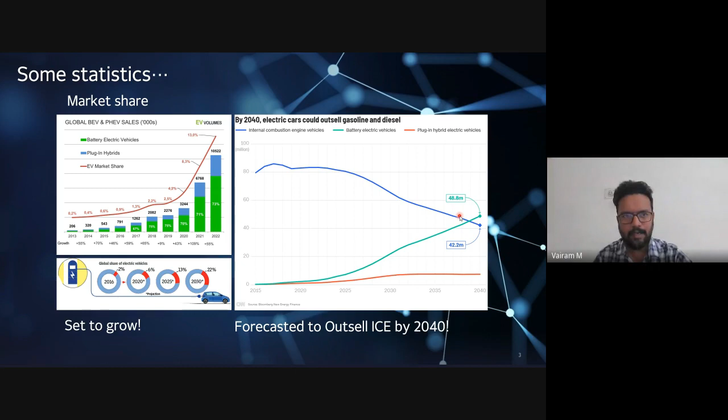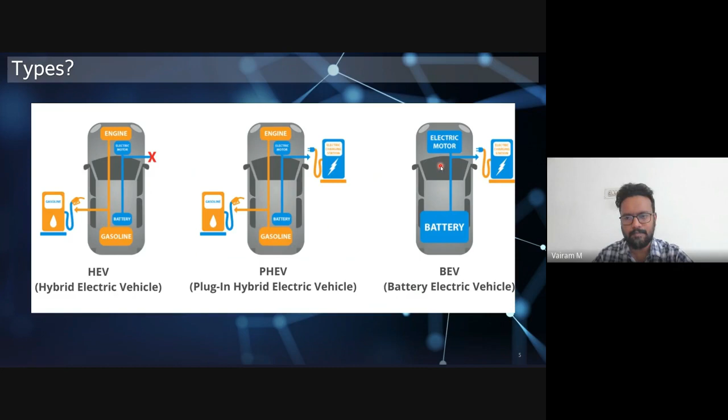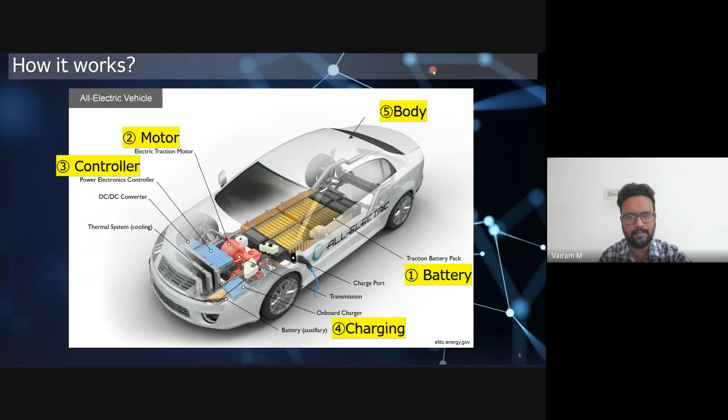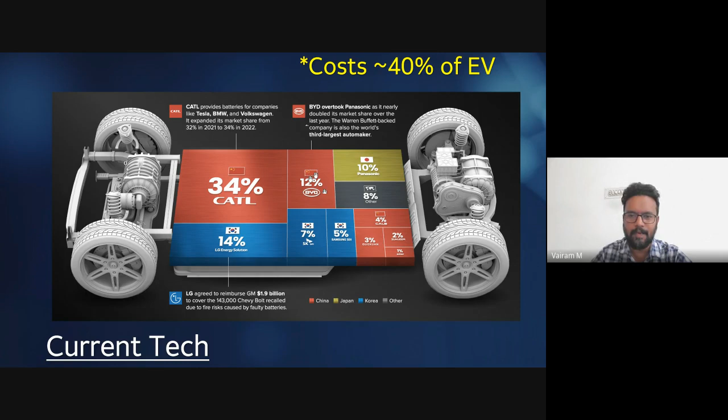Second is Korea. BYD is also mainly a battery manufacturer, so there's no surprise that they are leading the electric vehicle segment also.

Does anyone know what types are available in batteries? Lithium ion. And next, lead acid batteries. I have only 2 answers received - one is lead acid battery, and another one is lithium ion battery.

So where have you seen lead acid battery? Any idea? It is very commonly used in households, inverters, right? Yes, so most two-wheelers and, as you said, inverters and whatever power backup we are using, is commonly lead acid.

And lithium ion, can someone give an example? Mobiles, yeah, mobiles, laptops, and all rechargeable small electronic devices usually use lithium ion. So what is the challenge? As you can see, the most commonly used battery type in electric vehicles is lithium ion.

Because it is very... is my screen visible? Yeah. Okay, so as you can see, this is the power, energy density against weight. The x-axis is weight, and this is the energy density.

Volumetric energy density, and this is specific energy density. So lead acid is very low - it is very heavy and has very little energy storing capacity. This is nickel cadmium, and another nickel-related battery, and this is lithium ion. As you can see, lithium ion is already in the best position possible - even though it's the smallest in size and lightest in weight, it still holds the higher position for energy storing capacity.

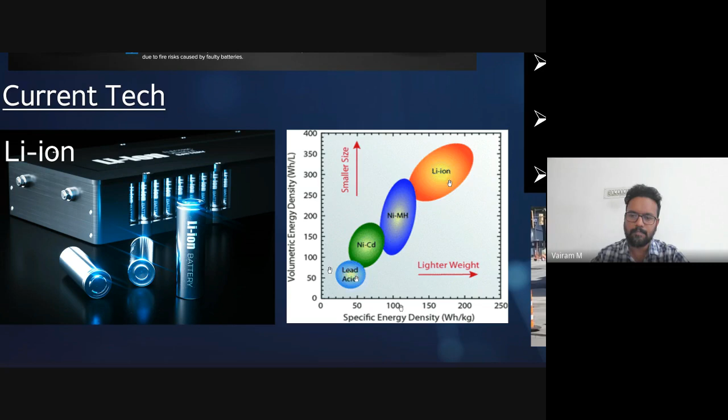That's the reason all small electronic devices can utilize lithium ion battery, and even in automobiles it has a major contribution. So, challenges - I already displayed it, but I will explain.

So one big challenge is about lithium. Lithium is taken from raw material by mining process, and the availability of that raw material is very less. And lithium ion batteries include some other materials like cobalt, or some other ions together. It is used, and they are also very expensive and very difficult to process, extract from the raw material. Okay? And it has degradation over time, and after so many cycles, it will be reducing the energy storage capacity. And recycling is a very big challenge.

So you might have seen that symbol in your mobile battery or something. So you should recycle it very carefully, right? So the same way, just imagine it is a small mobile battery, and just imagine some thousands of mobile batteries packed together and kept in a car. So how risky, or how much precaution we have to take for recycling that one.

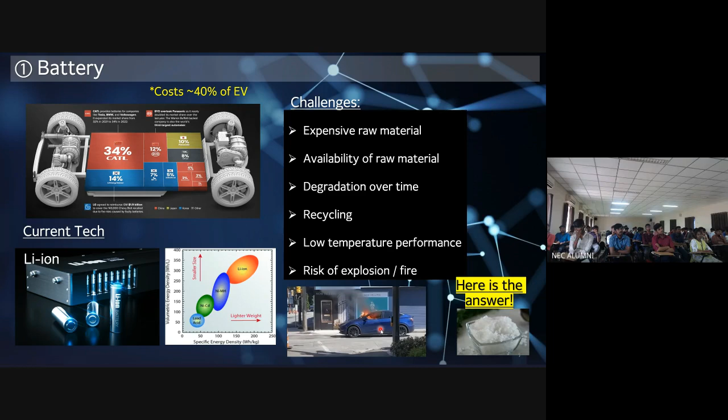I expect more answers. And I have given the clue in the screen, you can see. Okay, so one more clue. You can see it, we use it every day in our daily life. Sodium based. Sodium chloride based battery. Exactly.

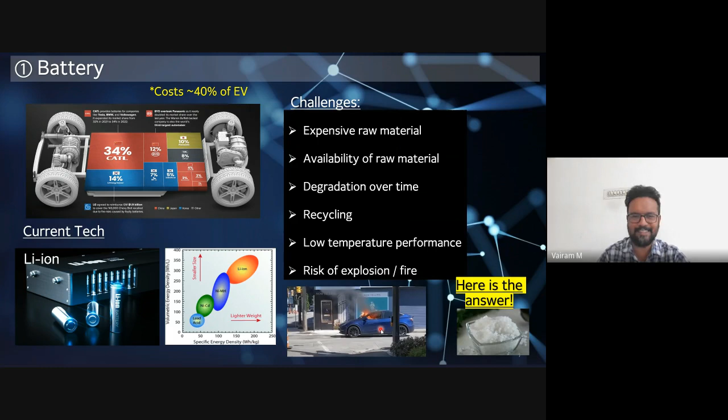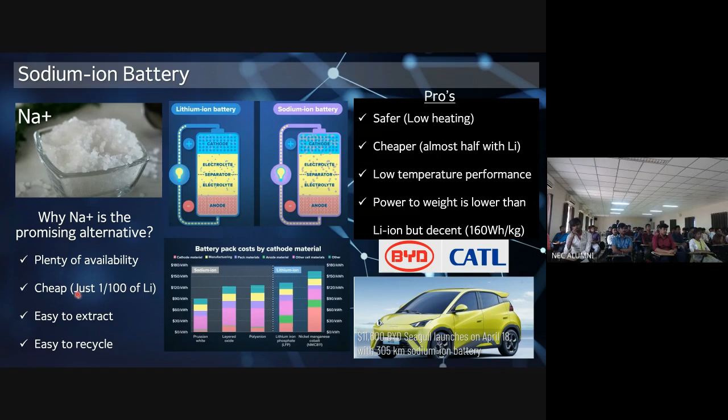So basically, it is a sodium ion battery. So there is plenty of availability in seawater, and it is very cheap compared to lithium. From lithium raw material, it is just a hundredth of the material cost, and it is easy to extract from raw material, and it is easy to recycle also. So that's why sodium ion battery is considered to be a promising alternative for lithium ion.

So still it is not 100% started using, right? So it is like an emerging technology. In earlier days, when they started exploring for battery development, this was also one of the options for sodium ion, also one of the concepts, which is very similar to lithium ion, but due to higher performance and manufacturing ability and usability, like versatile power storage capacity, lithium ion was preferred, and the entire industry was focusing on lithium ion.

But in a later period, everyone could understand, okay, lithium is a limited resource. It has a mining process, and we have to extract material, and it has difficulty for recycling. So while looking for the alternative, then again almost all the battery development industries are working on improving, focusing again on developing sodium ion batteries.

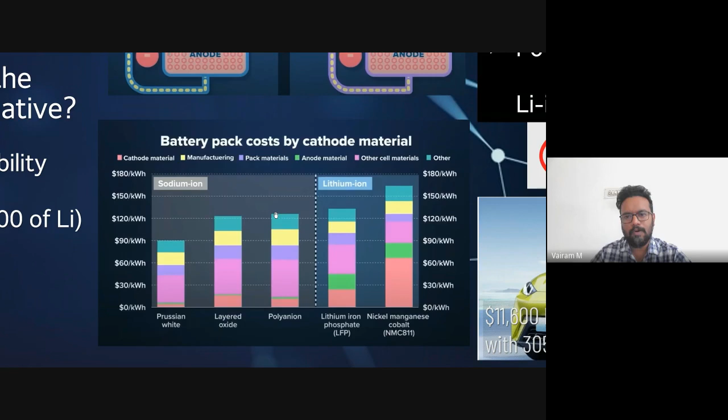So as you can see, whatever the development or implementation of new technology, the implementation cost plays a major role, because as you know, long back, batteries were expensive, electric cars were expensive. Comparatively, it is now reducing in cost. But if sodium ion comes into place, it can even further reduce cost, and almost half of this is the battery pack cost of lithium ion compared to sodium ion. So you can see almost half of lithium ion cost can be achieved by switching to sodium ion.

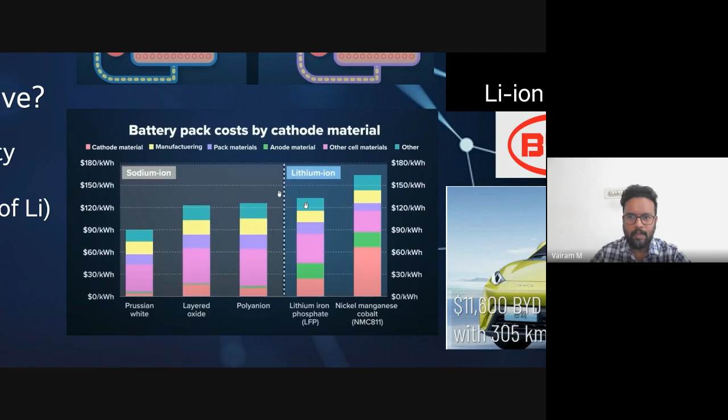So with sodium ion, we can achieve cost savings, and compared to lithium ion, we can almost achieve the same capacity of power to weight ratio, but it is comparatively closer, though still less compared to lithium ion. But there are many advantages: it is safer, it has low heating and low risk of explosion, and it is easy for recycling, and it is cheaper. As I said, it is half as expensive as lithium, and it can perform well in low temperature.

And so currently, the main battery manufacturing companies like BYD and CATL have already started manufacturing. They invented the manufacturing technology for mass production of sodium ion batteries, and it has already started being adopted as an alternative for lithium ion. So you can see this BYD Seagull. It was launched last April. It has about 300 kilometers of range. It is made with sodium ion battery.

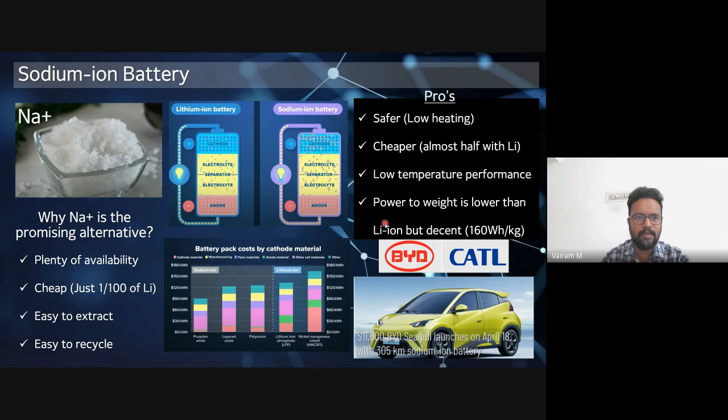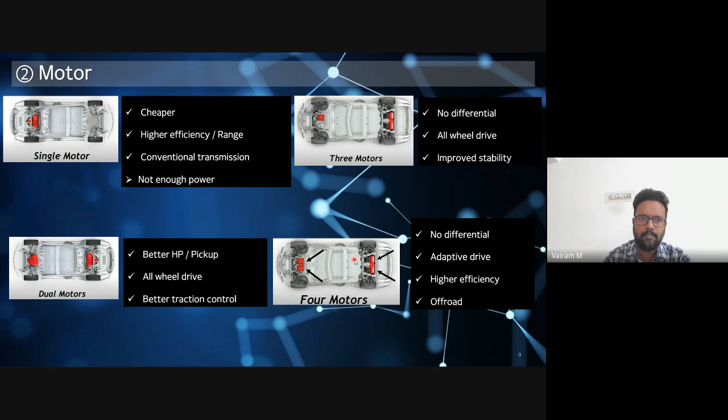Can someone say? By the name itself, we can guess what is the basic difference. Any guess? What is the answer? Axial? Wait, axial flux - what is the axial flux? Say something.

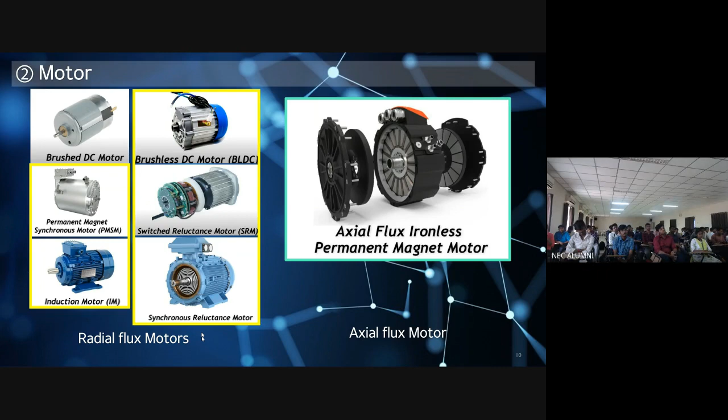One student is saying the arrangement of magnets is different. Exactly, that's a very good answer. Actually, yes - arrangement or alignment of magnet, or you can say magnetic flux, is perpendicular to the rotary shaft in radial flux, and it is inline or coaxial in axial flux motor. So that's the basic difference, as you can see here.

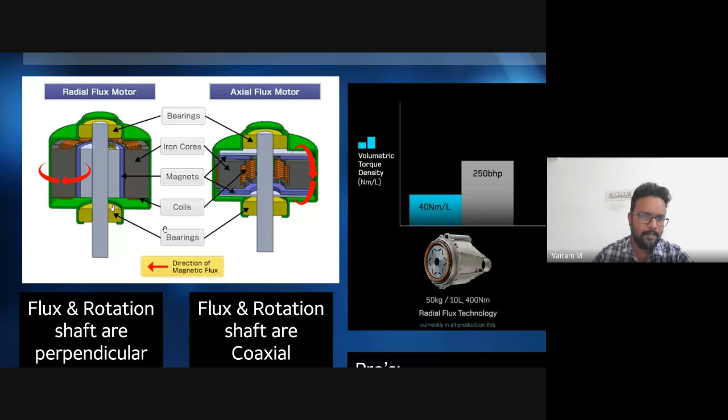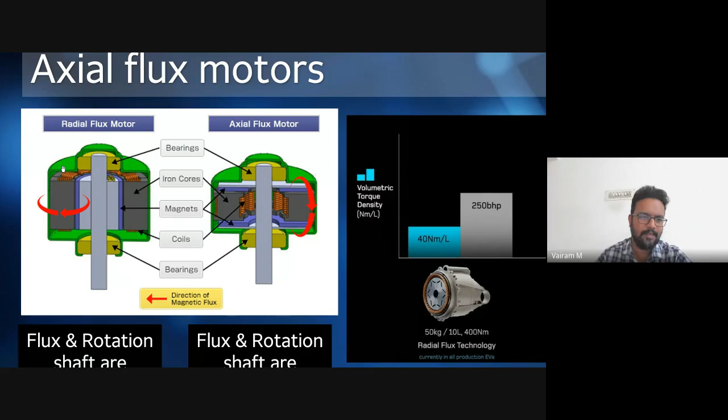So you might have already studied this topic maybe in electric drive. Radial flux has a perpendicular flux, and this one is coaxial.

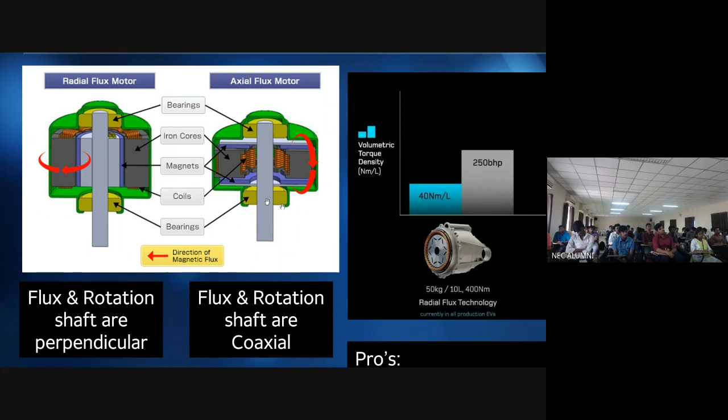So what is so new in this axial flux? It is comparatively smaller in size, and it can provide more torque output, and it is more durable.

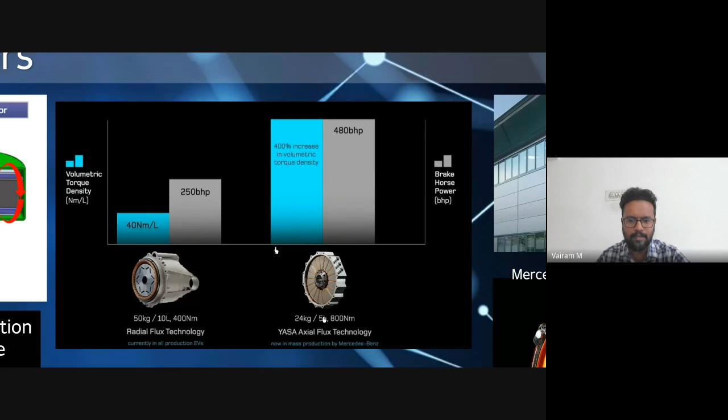So here is a comparison of torque output of motors. This is radial, a very common type used in electric vehicles, and this is an axial type example. The radial type has output torque 400 Newton meter and 250 bhp - you can see almost half the size, half the weight - this is 50 kg weight and this is just 24 kg, 10 liter of volume versus just 5 liter, and almost double the horsepower is produced.

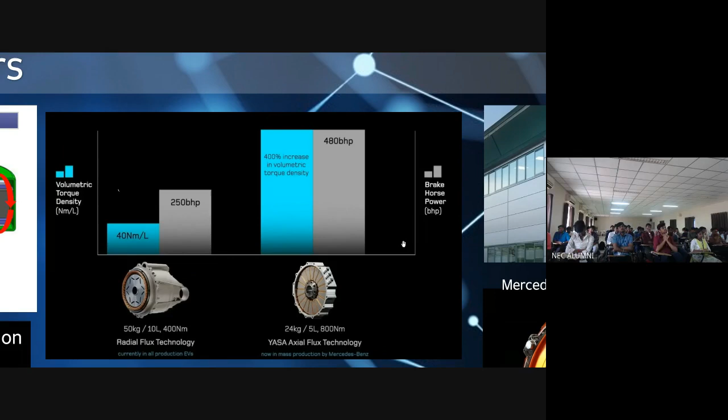And if you see the volumetric torque density, it is 4 times higher than radial flux. Then why is it not used so far?

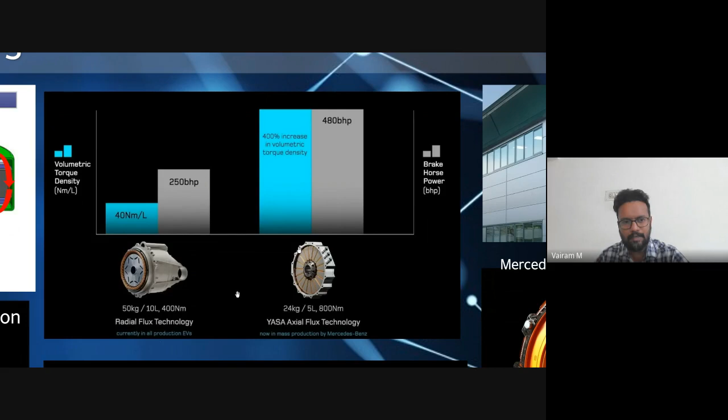Right, so similar to what we said for sodium ion, this concept or type of motor is already available from very long back, but how to produce it as mass production, or how to manufacture it in a cost effective way - that is not established yet. So that was the challenging point to implement it as an alternative for radial flux.

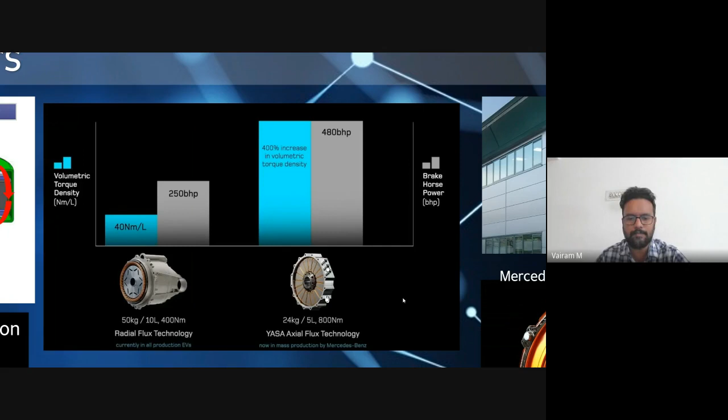So as I said, this is smaller in size with more torque output and better traction control. But it is complex in design and more challenging and expensive to manufacture.

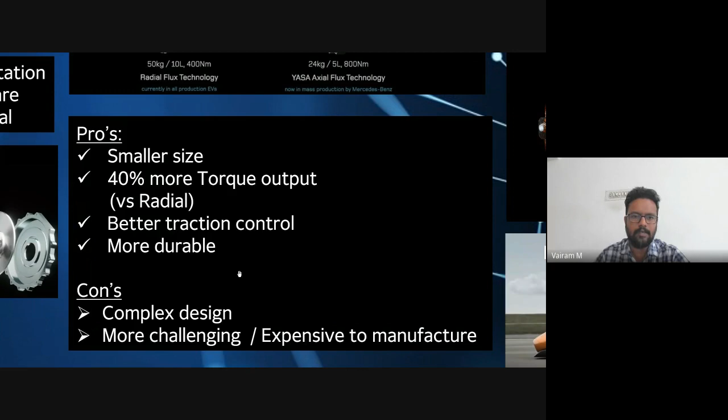So has anyone heard about this company named YASA? It's a British origin company. They are manufacturing motors - one of the leading manufacturers for axial flux technology.

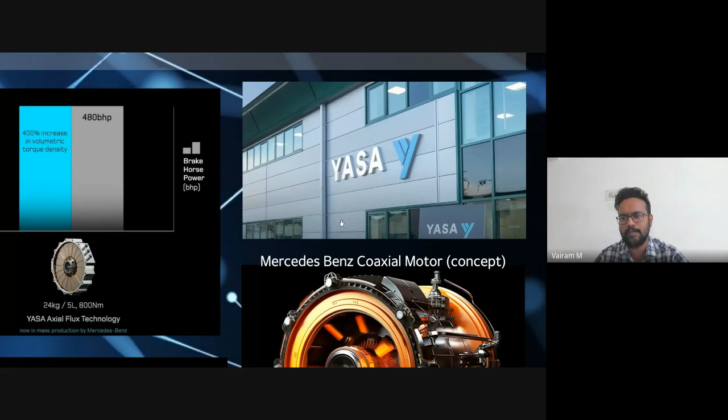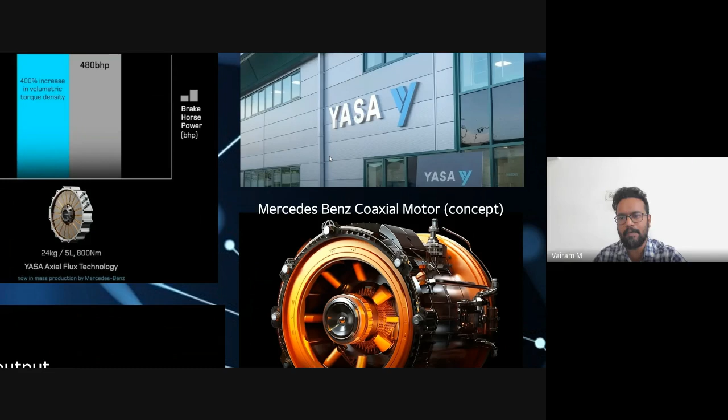In earlier days, maybe around 40 or 50 years ago, they already started axial flux, but it was discontinued - no one had interest in axial flux because of this complex design and difficulty to manufacture. But at that time, Mercedes-Benz bought YASA and invested in R&D, and they developed further and invented the mass production condition and production method, and they are planning to implement it as an alternative in upcoming vehicles.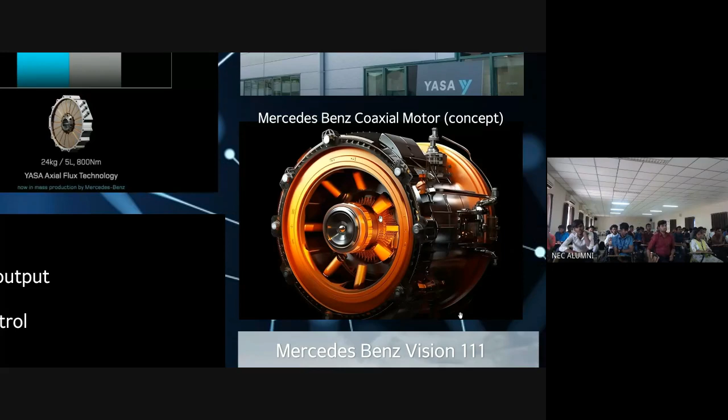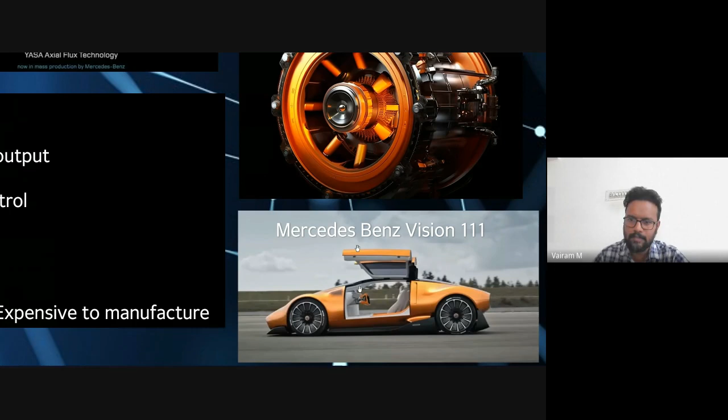So this is just a concept of coaxial motor going to be used by Mercedes-Benz. This will be the first car from Benz to use axial flux technology - the Mercedes-Benz Vision 111. So for now it's in concept phase. So far, any questions?

Any questions? Okay. Sir, I'm Akash. Yes, yes, please.

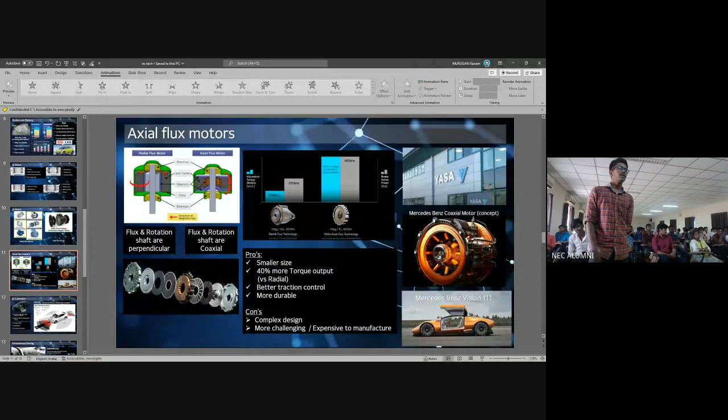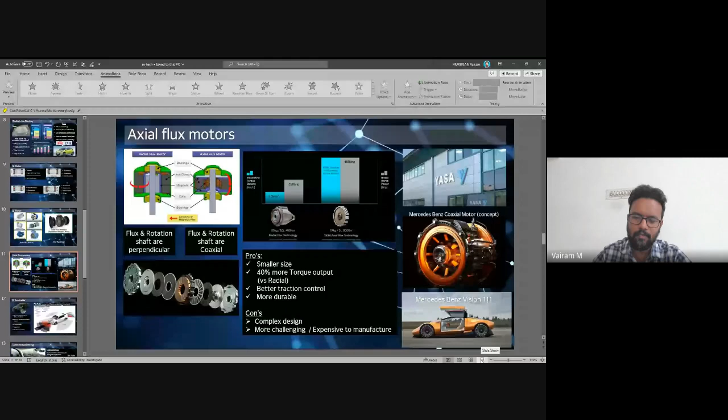Like heavy duty vehicles we can use, but so far we are not able to use it fully because it is a complex design. Whenever you want to commercialize something, you have to manufacture it in a cost effective way. If it is too complex to manufacture, you cannot implement it as a commercialized version, right? As a concept version or one time manufacturing you can do, but if you want to sell it and it is too expensive, for example 10 times more expensive than radial flux, why should I buy it? So that is a basic issue.

Whatever may be the industry, the cost plays a decisive role. Major decisions are taken from the cost effective point of view.

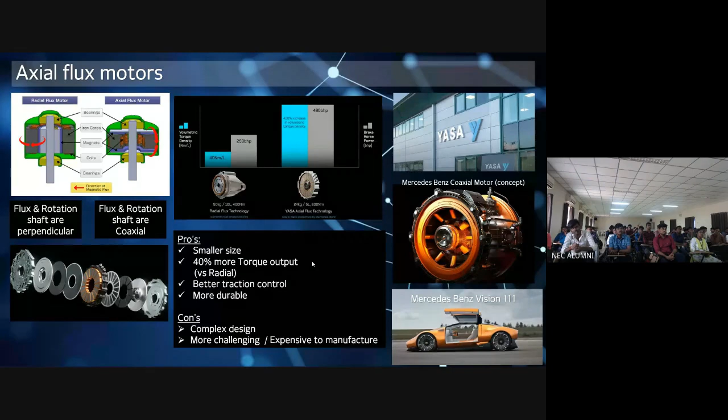I have one question. Yesterday Tesla launched the Cybertruck. Please share some views on the Cybertruck. Yes, sir. I have some points related to the Cybertruck in upcoming slides. We will discuss that together. Okay.

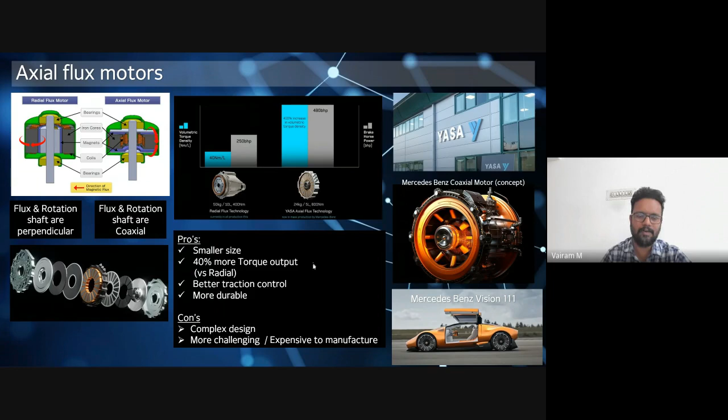Moving next from motors, we have a controller, right? Have you heard the term ADAS, Advanced Driver Assistance System? Since it is electric cars, the entire discussion is oriented towards electronics control and electrical drives, but don't think it is not our subject. It is a part of our core subject. So can someone say what they know about ADAS?

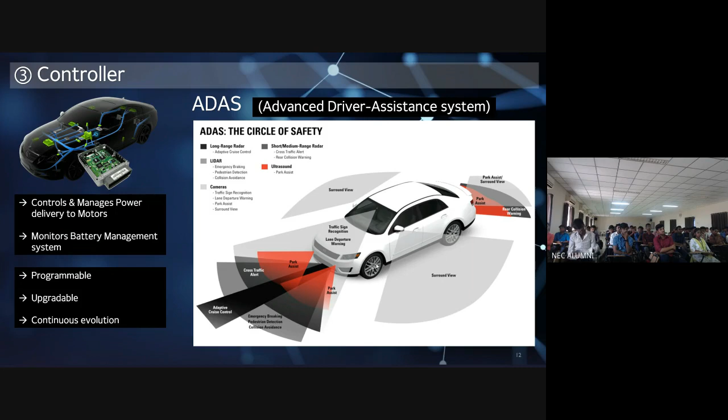Sensors. Very good. It is used in autonomous vehicles. It is used for detecting the path, lane control. Like the Mahindra XUV 700, they have implemented ADAS in India. Exactly. And MG Motors has an ADAS system.

This advanced driver assistance system is one of the safety features. Basically it has many sensors; it takes input from the surroundings and makes a decision by itself based on the logic program. So why is it so related with electric vehicles? Why not IC engines? Any answers? We have ADAS systems in IC engines also. ADAS and autonomous driving are two different topics.

ADAS is basically for assisting. Mainly adaptive cruise control and emergency braking: if some obstacle comes across all of a sudden, it can brake by itself without waiting for the driver to push the pedal. These safety features are based on ADAS, and all the automotive giants are investing a lot of R&D in ADAS. So why it is so related with electric vehicles, maybe you can see from this image.

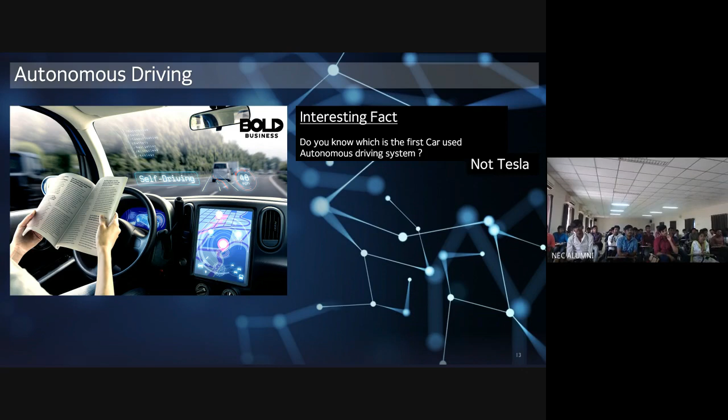The second was already mentioned by someone: autonomous driving. So one open question: does anyone know which was the first car to implement an autonomous driving system? And I added a comment, it's not Tesla. Google, I think so. No, sir. Volvo? Not Volvo. I think it should be Apple, Microsoft, or Google. It is an automotive giant. Automotive giant, okay.

And it was done way back, more than 30 years ago. It is actually Mercedes-Benz. Around the 1980s, they implemented the first autonomous car. It had autonomous driving features like lane changing and cruise control.

So what is so interesting about self-driving and driverless cars? You might have seen many automotive expo images with the concept of a driverless car, where there is no steering at all. It is automatically driven. Those are continuously evolving technologies, implemented in some areas.

As you well know, self-driving is already well established in Tesla. From the beginning they have been working on the autonomous driving concept, so Tesla is way ahead of other automotive makers.

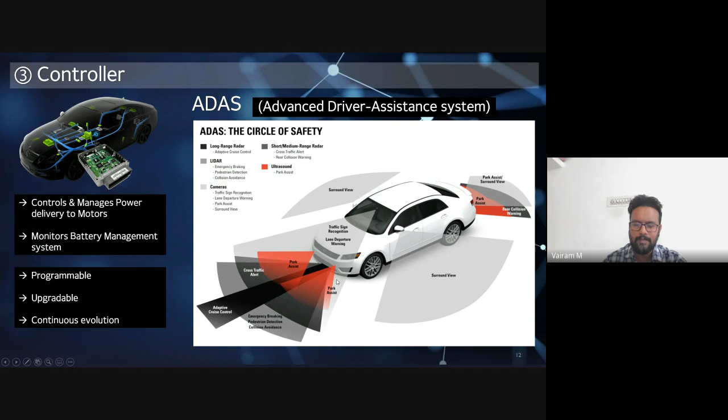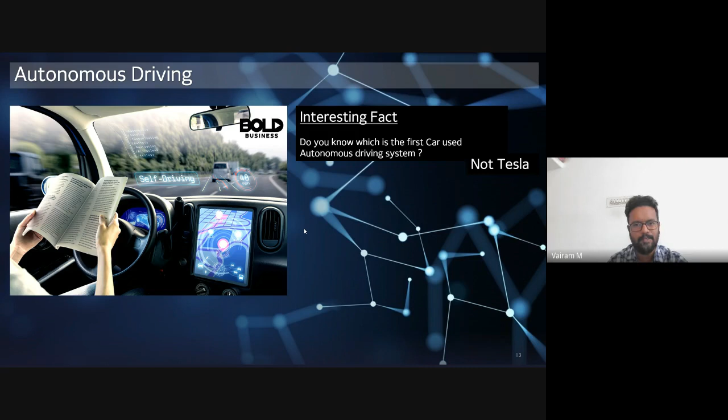It is also a continuously evolving technology, and you might have already seen videos about Tesla autonomous driving and the XUV 700. Those are ADAS features, and MG has implemented them too. So maybe we'll move to the next one.

Okay, so next is charging. Charging plays a major role, right? We have to charge the vehicle for a certain period to drive; it may take about 7 or 8 hours, very long hours, for battery charging. So one emerging technology is called vehicle to grid. So why do we need it at first?

In simple words, vehicle to grid means the battery of a vehicle will be used as an energy source for other electric appliances. For example, from the grid, our EB connection, we receive power to our house, we connect the charging unit, and through the charging unit we charge our electric vehicle, right?

So sometimes when there is a peak load for the grid, it can give back some charge. So why do we really need it? It means there might be a power surge all of a sudden, a supply-demand peak all of a sudden. So as we are charging the electric vehicle for long hours, it will be kept connected all the time. So whenever there is a fluctuation, the battery of the electric vehicle can support, so that the entire balance of supply and demand can be managed better.

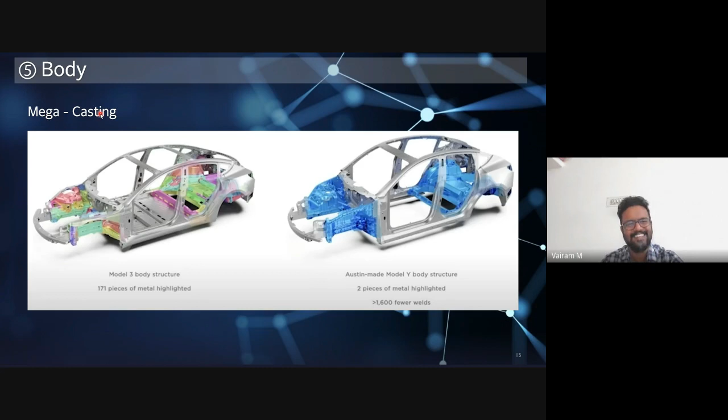So, any idea what manufacturing method is used very commonly in automotive body construction? Oh, sorry, the title is casting, but it is not related to casting. Casting is not the very common method used for manufacturing the automobile platform. It is an evolving technology, but it is not 100% adopted. Anyone knows? Sheet metal pressing. Exactly. Sheet metal pressing and assembling with robots.

Exactly. And the exact process used for sheet metal assembly, the joining process? Spot welding. Exactly. Sheet metal is a normal sheet with a defined thickness, from 0.65 mm to maybe 3 to 4 mm maximum, formed into the required shape with a simple forming process, and small parts are assembled together generally with spot welding, or wherever there is no access, they use arc welding. So this is the primary manufacturing method for the automotive body.

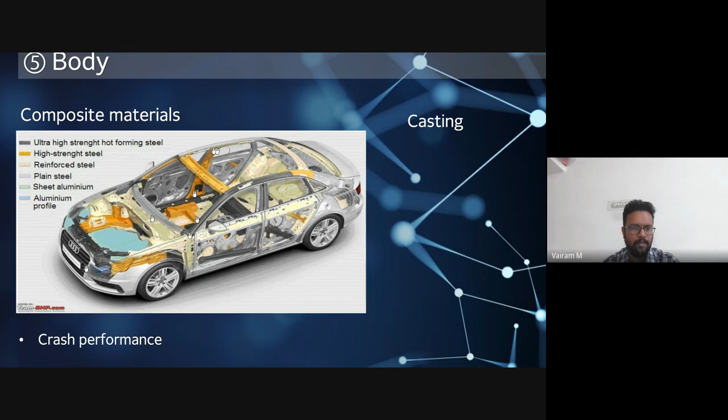and we can balance the weight also. So that is why the composite material is continuously evolving, and it is one of the big opportunities to balance the weight addition due to the battery. So in relation to composite material usage also, there is a lot of evolution happening. There is usage of even carbon fiber instead of sheet metal parts, and even plastics have been used as an alternative for skin panels. So that is another evolving area.

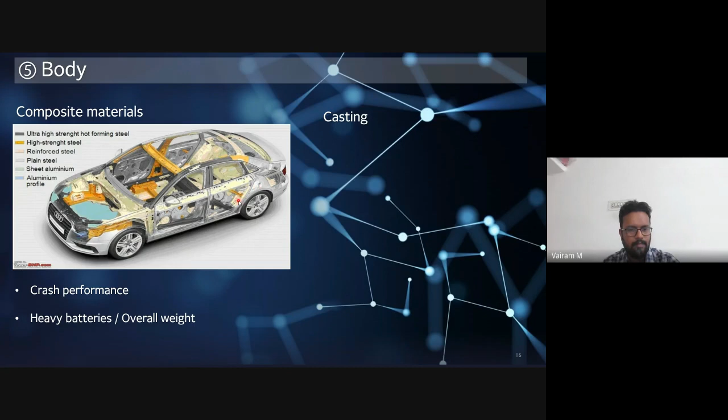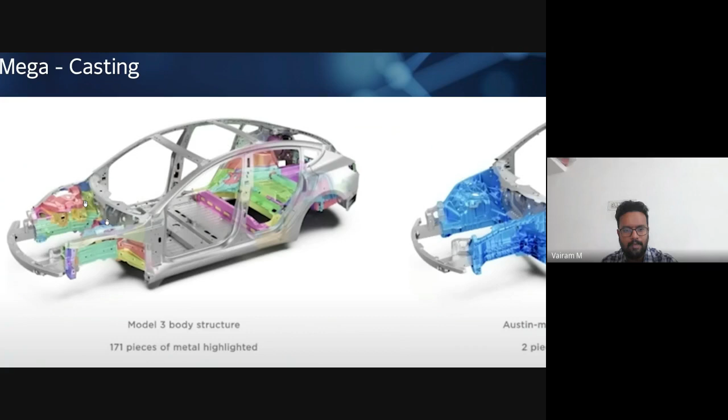And moving back to the casting portion. So in this area, you can see there are a lot of complicated structures assembled. Okay, and this is very crucial for crash performance, and it is where the suspension is mounted, and we have to use very high strength materials for this area. And instead of making so many small parts and making an assembly, we can switch to casting. Okay. So casting is a completely different type of manufacturing, and sheet metal assembly is completely different.

And you cannot do the casting using iron. I mean, it will be too heavy. So preferred is aluminum alloy. So if you use aluminum, again, there is another challenge: how you are going to connect with other parts. You cannot weld together aluminum and other sheet metal parts. So there are special joining technologies for assembling these parts. So what Tesla is doing, they are trying to cast the entire front assembly, right? The entire front assembly, they are trying to cast as a single piece.

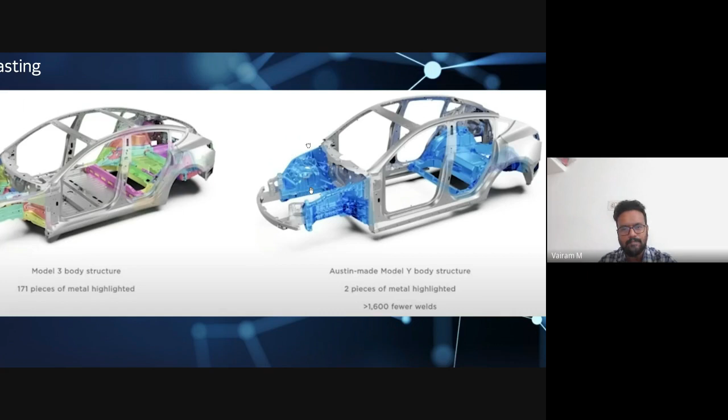Imagine how much size will be required for molding or casting this heavy structure. And they are trying to use very big advanced press machines, about 9,000 tons, which is about 10 or 20 times higher than the usual press machines. So many in the automobile industry are working on implementing this casting method in the automotive body.

And as I can say, the entire piece is made as a single part. So more than 1,600 spot welds are reduced. In the usual case, about 5,000 to 6,000 spot welds are done for each car. So you can reduce a plenty amount of spot welds by switching to casting.

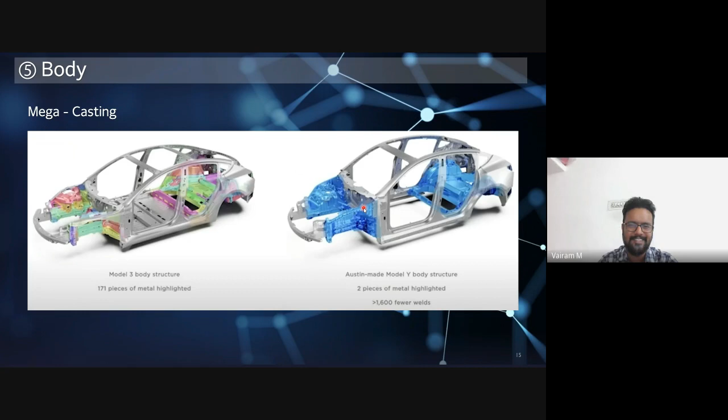Are there any questions so far? If you have any questions, you can ask now. Come on.

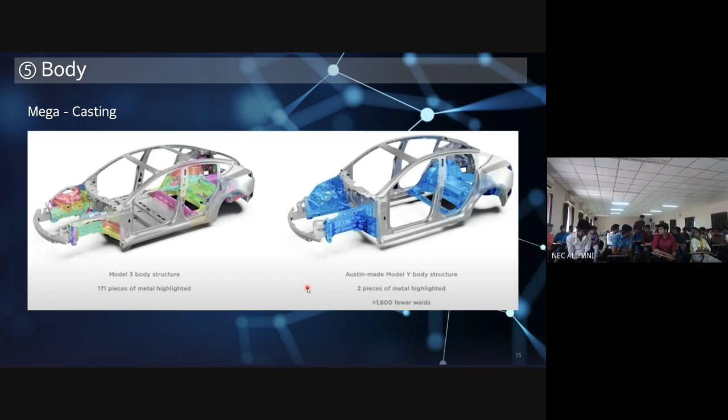If you have any question, you can ask now. Yeah, come forward. Hello, sir. Hi, sir. My name is Manikathan, sir, third year mechanical. I have one question. Shall I ask? Yes, please.

Why do e-vehicles slow down in snowy areas? Why does it slow down in snowy areas? So, in very low temperatures, you are saying. Okay. So as I said, it depends on what type of battery we are using.

So mainly, as I said, the commonly used battery is lithium ion. Lithium ion loses its energy storage capacity and power-to-weight capacity in low temperatures. That is the reason it cannot deliver the same output as at normal temperature.

So as I said, there is one evolving technology to use sodium ion as an alternative. If it is successfully implemented, there is a possibility we can drive in snow with the electric car. That's it. Thanks. Thank you.